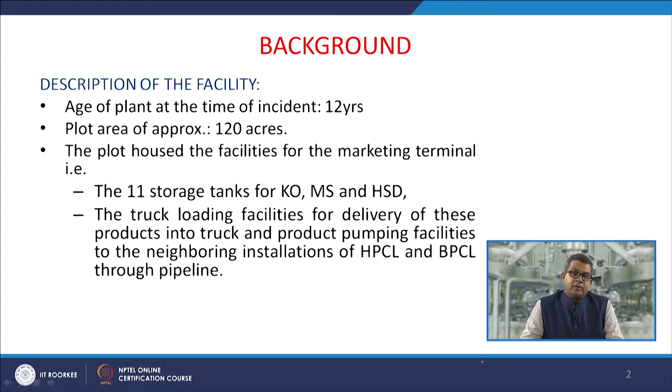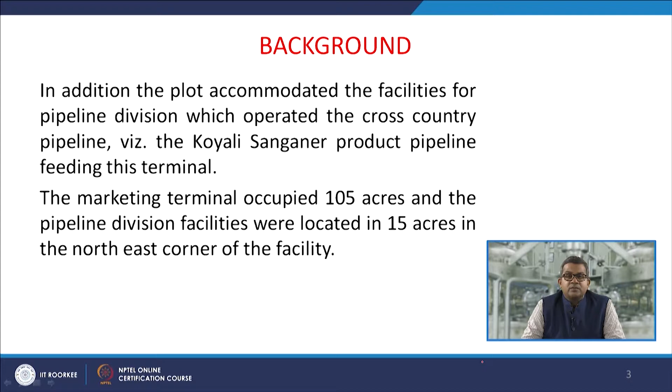Apart from this, they were having truck loading facilities for delivery of these products into trucks, and product pumping facilities to the neighboring installations of Hindustan Petroleum Corporation Limited and Bharat Petroleum Corporation Limited through pipeline. Apart from this, the plot accommodated facilities for the pipeline division, which operated the cross-country Koyali-Sanganer product pipeline feeding this particular terminal. The marketing terminal occupied around 105 acres, while the pipeline division facilities were located in 15 acres in the northeast corner of the facility.

So this was the Koyali-Sanganer pipeline. Here is Sanganer. This is the oil pipeline network of IOCL. They have some existing product pipelines and crude pipelines, well connected with the various refineries of Indian Oil Corporation. Apart from this, they also have certain LPG pipelines. So this is the piping network of Indian Oil Corporation.

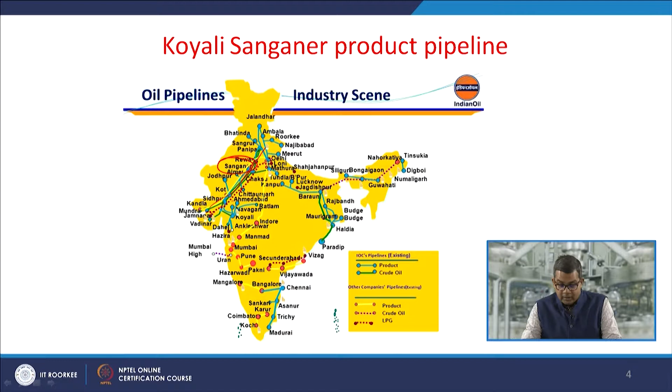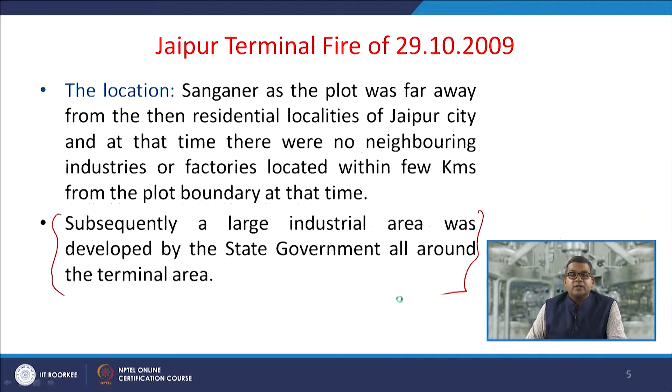Now there are certain salient features of this Jaipur terminal. It was the first automated oil terminal in the country, and this terminal was fed by the Koyali-Sanganer product pipeline, receiving products like motor spirit (petrol), high speed diesel, and kerosene from the Koyali refinery. The terminal also used to receive and distribute lube oils in drums through trucks.

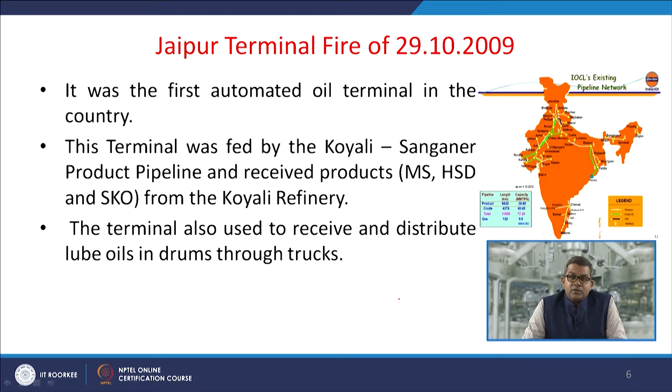So they had storage facilities for lube oils. The terminal delivered petroleum products through tank trucks to retail outlets and also supplied lube oil to the local market of Rajasthan. This particular terminal also supplied petroleum products to the neighboring terminals of other oil companies like HPCL and BPCL. Now, the BPCL Sanganer terminal is dependent entirely on receipt of product from this IOCL terminal.

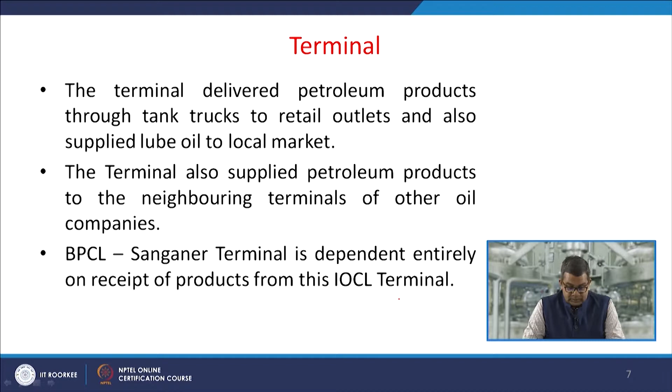This is because these oil companies have some sort of internal arrangement so that they can borrow product from one terminal and share an equivalent amount of product from their own terminal to the other oil company. Now earlier, the HPCL Jaipur terminal in Sanganer, which was in close proximity, was also solely dependent on the supplies from this facility only.

But after the commissioning of the Mundra-Delhi Pipeline (MDPL), the HPCL Jaipur terminal at Sanganer has been closed down for operation, since the commissioning of HPCL's own pipeline terminal at Bagaru, which is only 30 kilometers from Jaipur. So you can see this is the Mundra-Delhi pipeline, and they are having their own terminal here.

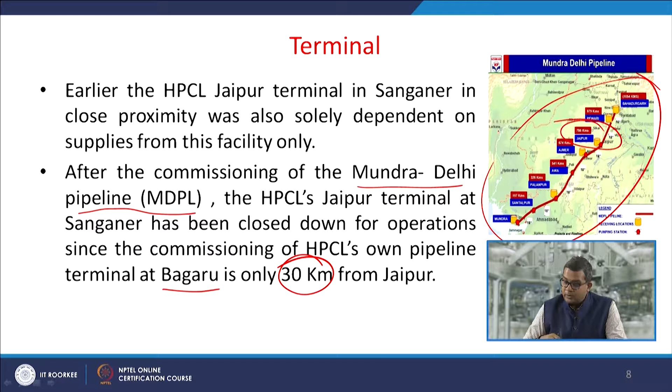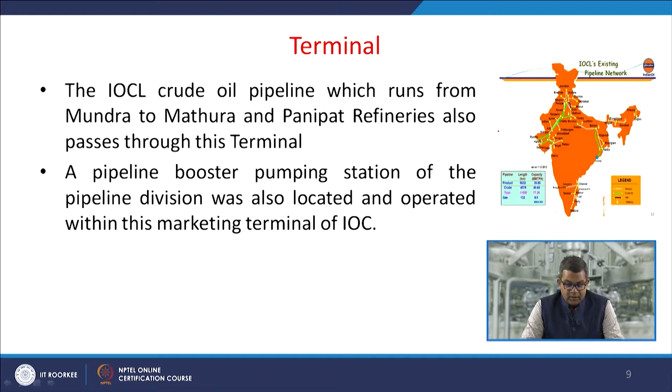Now the IOCL crude oil pipeline, which runs from Mundra to Mathura and Panipat refinery - because in the northern belt, Mathura and Panipat refineries are owned by IOCL - also passes through this particular terminal. So a pipeline booster pumping station of the pipeline division was also located and operated within the marketing terminal of Indian Oil Corporation.

So they had very good storage facilities. The storage facilities originally consisted of 9 tanks for petroleum products, and subsequently 2 more tanks were added for motor spirit, followed by 1 more tank that was not commissioned at the time of the accident, under the pipeline division, for receiving the pipeline interface. There are certain interfaces because sometimes these pipelines carry more than one product, so the interface material is usually sent back to the refineries.

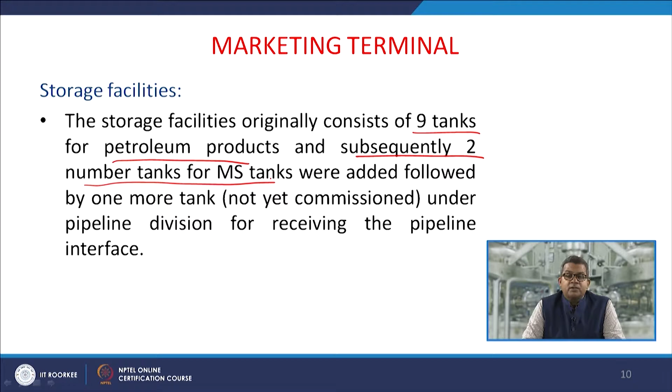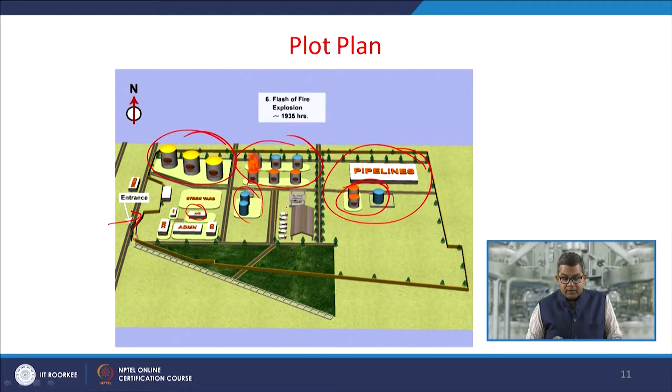So in all, they were having all the tank facilities over here and there. This is the tank lorry depot. Now this is, you can say, the more clear form.

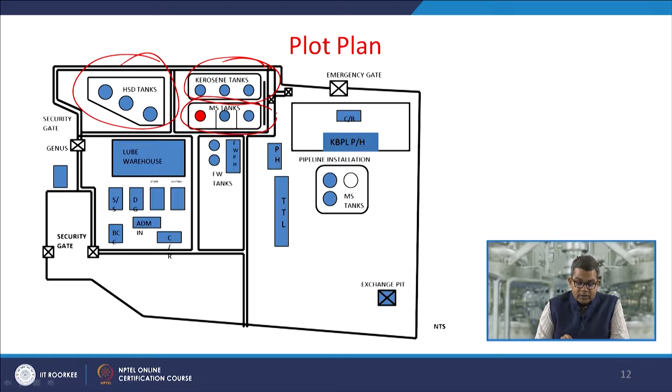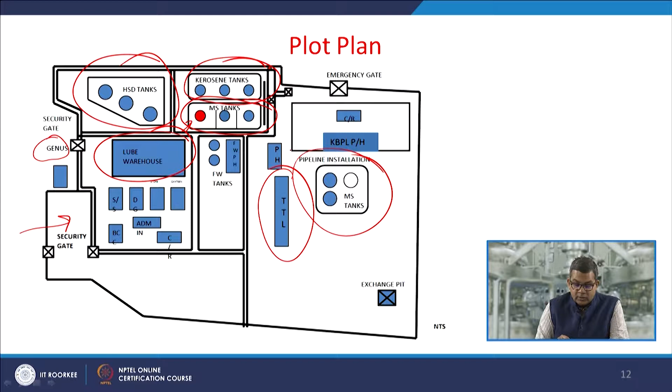Here they were having the high-speed diesel tank facility, the kerosene tank, and the motor spirit tank, which was involved in that particular accident. They were having the lube warehousing apart from the security gate, and adjacent to the security gate they are having one inverter factory called the Genus factory. This was the pipeline installation, and this is the tank truck loading facilities, etc. This was having the exchange pit.

So while we are having the continued discussion about the storage facilities, the underground tanks were 5 in number, each having a capacity of 70 kiloliters for the storage of the petroleum product. Each tank had facilities on 3 modes, and that is important - that was the main crux of the accident.

One mode was the pipeline receipt, so when the material is coming through the pipeline. Second is attributed to the inter-tank transfer, and third one is the dispatch. So these two facilities, the pipeline receipt and dispatch, were inlet and outlet, and this one is for the inter-tank transfer. So when you are having 2 tanks in line, you may connect these 2 tanks. Apart from this, one is inlet, another one is the outlet.

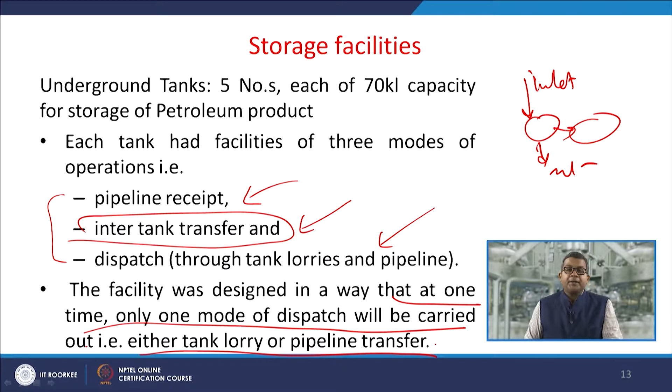Now this facility was designed in a way that at one time only one mode of dispatch will be carried out, that is either tank lorry or a pipeline transfer. So this is again a very important aspect of the designing.

Now each mode of operation was achieved by a positive isolation of a tank. So the proper safety installation or proper safety devices were there. Isolation of the tank from other operation modes using 2 isolation valves, attributed to the gate valve, and they were having a blind or a blank in between them.

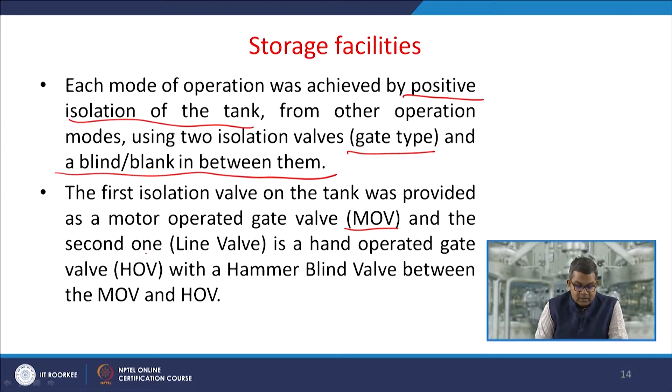So the first isolation valve on the tank was provided as the motor operated gate valve, and in the subsequent slides this is referred as MOV. The second one is the line valve, which is the hand operated gate valve, referred as HOV.

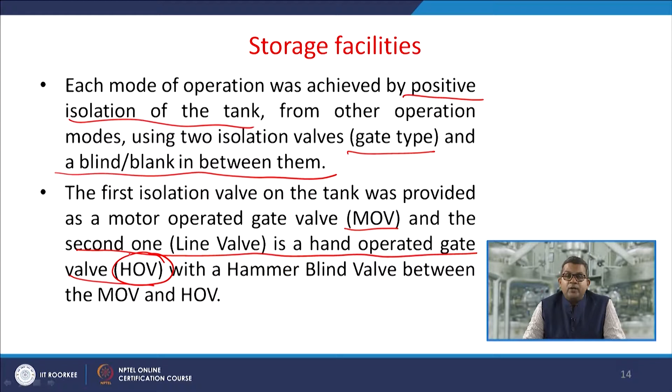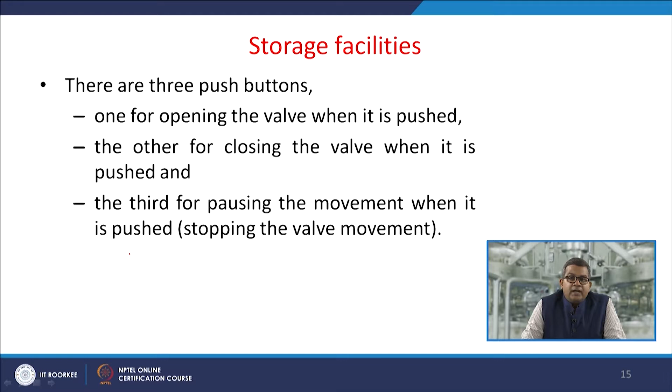Now this they were having a hammer blind valve between the motor operated valve and hand operated valve. They were having three push buttons - one for opening the valve when it is pushed, the other for closing the valve when pushed, and the third for pausing the movement when pushed, for stopping the valve movement. Now these valves can also be operated by means of a hand wheel, just like any other hand operated valve.

So the valve was to close automatically in case of power failure as per the original design feature. Sometimes it may be violated. So at the time of the incident and for the past several years, the facility of remote closing of the valve from the control room and automatic closure of the valve on power failure has not been operational. This facility has been made defunct since 2003 - one of the main reasons why this accident took place.

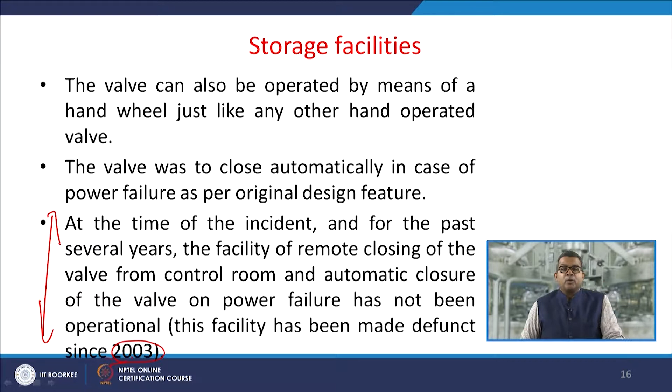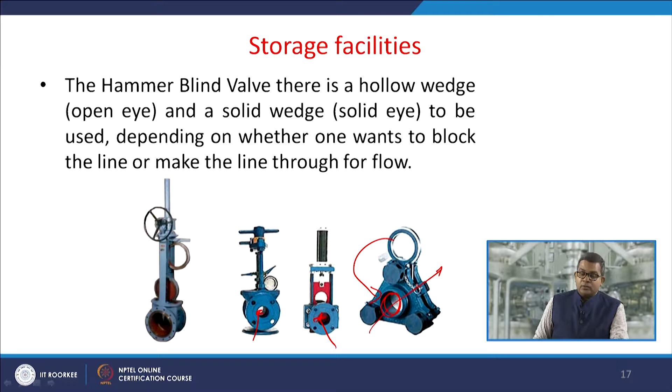So whenever it operates, it moves like this direction - the opening may take place, and if it is like this, then no flow can pass through this particular valve. So there are four different types of HOVs. This is the hand wheel through which you can control the flow, either close or open.

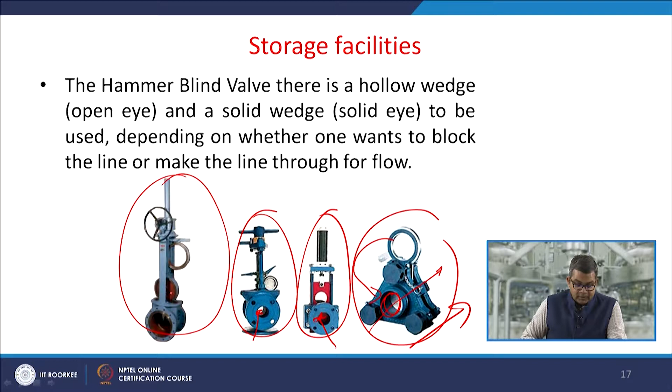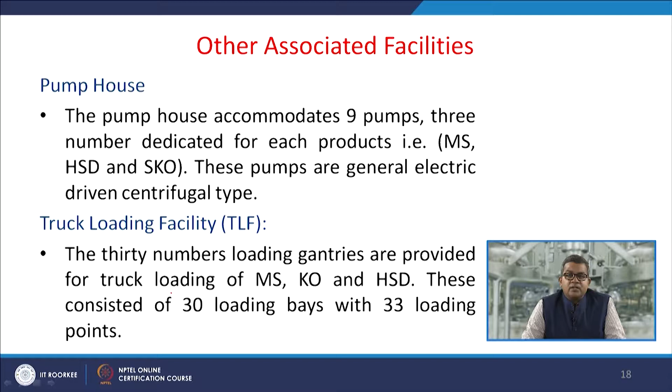The plant was having the truck loading facilities referred as TLF. There are 30 numbers of loading gantries provided for truck loading of motor spirit, kerosene and high speed diesel, and this consists of 30 loading bays with 33 loading points.

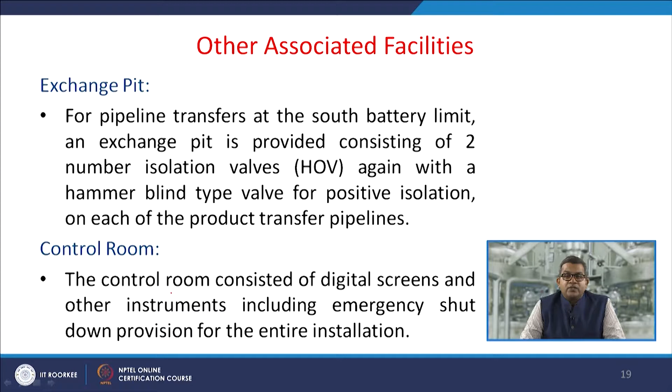They were having a control room. The control room mainly consisted of a digital screen and other instruments, including emergency shutdown provision for the entire installation.

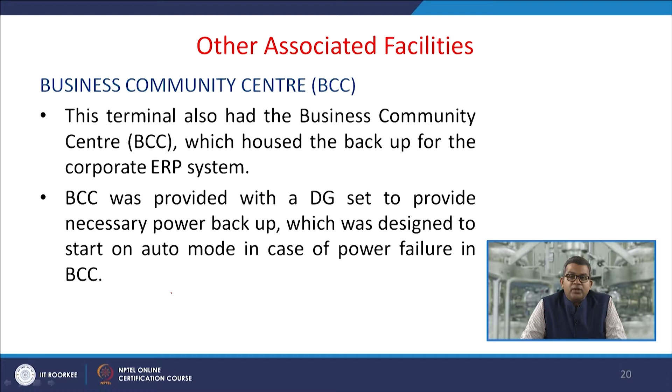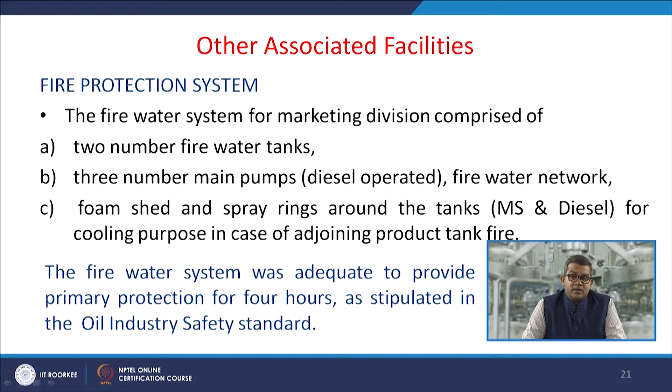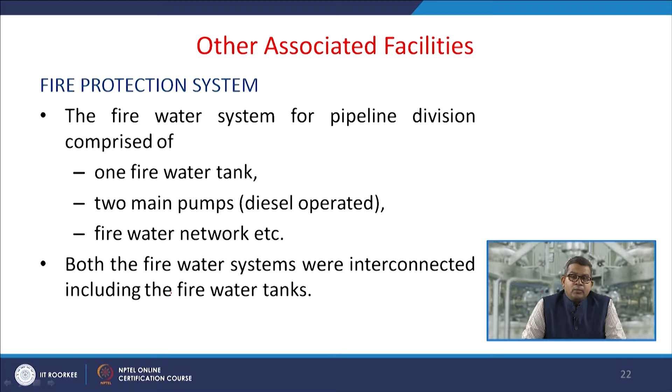The fire water system for the pipeline division was comprised of 1 fire water tank, 2 main pumps, usually diesel operated, and a fire water network. Now both fire water systems were interconnected, including the fire water tanks.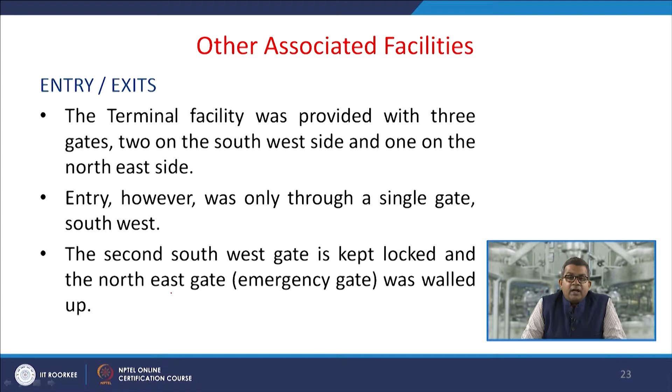They were having some entry and exit protocols. The terminal facility was provided with 3 gates, 2 on the southwest side of the plot and 1 on the northeast side. So why am I telling you all these things? Because at the time of the accident, the meteorological conditions also played a very vital role. So entry was only through a single gate in the southwest, the second southwest gate was kept locked, and the northeast gate was used in terms of emergency protocol.

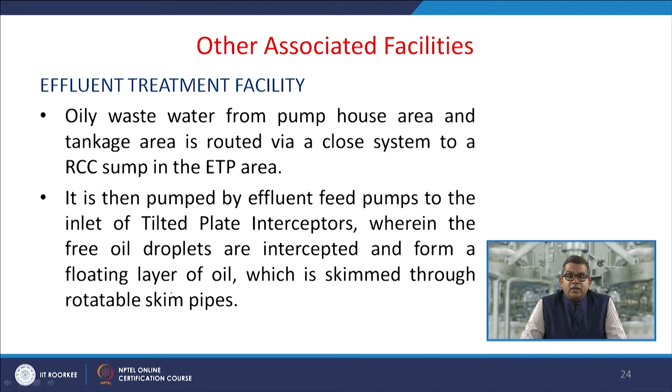Apart from other things, they were having effluent treatment facilities. So oily wastewater from the pump house area and tankage area is routed via closed system to an RCC sump in the effluent treatment plant. It is then pumped with the effluent feed pumps to the inlet of tilted plate interceptors, wherein the free oil droplets are intercepted and form a floating layer of oil, which is skimmed through rotatable skimming pipes.

As far as the personnel are concerned, the Jaipur terminal worked under the overall guidance of the General Manager, Rajasthan State Office. They have the IOCL regional center at Jaipur. Apart from this, there are 10 other officers with different responsibilities, 24 blue collar workers, and 4 clerical staff.

Now let us have a discussion about the operation. This terminal usually operated in 3 shifts for terminal operation, with timings of 6 a.m. to 2 p.m., 2 p.m. to 10 p.m., and 10 p.m. to 6 a.m. in the morning.

The TLF, that is the truck loading facility operation, was restricted to the morning general shift operation, from 8 a.m. to 5 p.m. The control room was supposed to be manned, but there was no dedicated person for it, and occasionally when all 4 people were out in the field for different jobs, it remained unmanned. This is again a problematic issue.

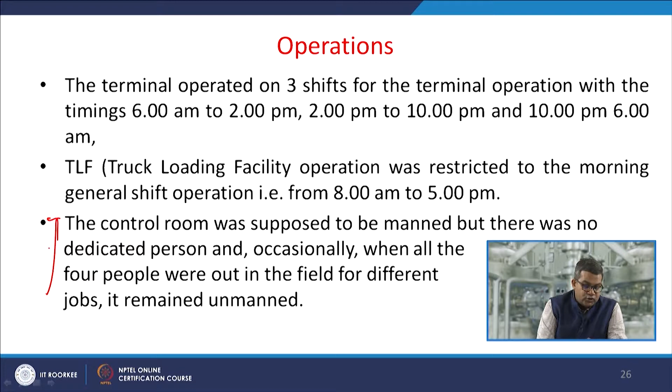In the evening shift of October 29, 2009, the IOC petroleum oil lubricant terminal at Sanganer in Jaipur was preparing to transfer kerosene and motor spirit to the neighboring BPCL terminal. That was obviously a routine operation.

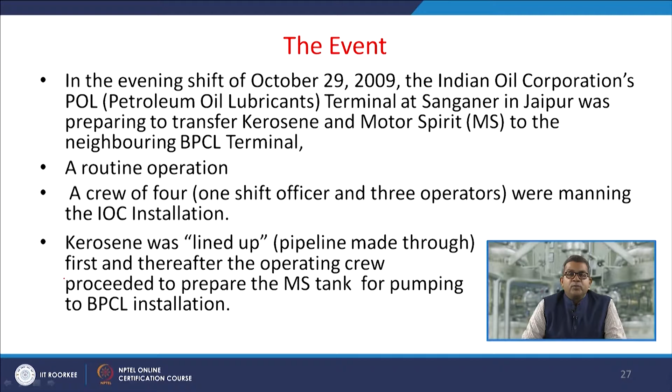So a crew of 4, 1 shift officer and 3 operators, were manning the IOCL installation, and kerosene was lined up first, through pipeline, and thereafter the operating crew proceeded to prepare the motor spirit tank for pumping to the BPCL installation.

So in the process of lining up the MS tank, at around 6:10 p.m., a huge leak of the product took place as a jet of liquid from the hammer blind valve on the delivery line of the tank leading to the MS pump, that is the motor spirit pump. This liquid petrol rapidly generated vapors and soon overwhelmed and incapacitated the operators carrying out the lineup operation. They were practically helpless at the moment, because the quantum, velocity, and pressure were so high.

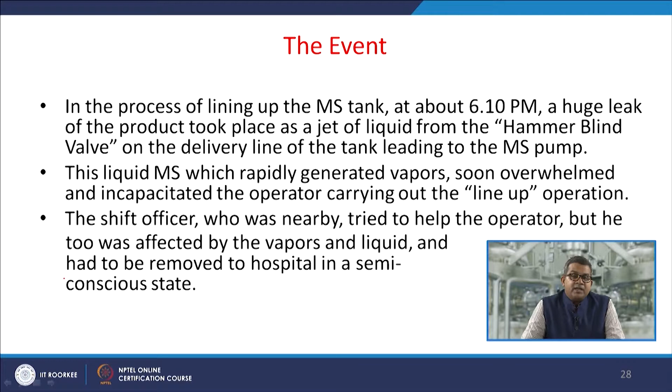The shift officer who was nearby tried to help the operator, but he too was affected by the vapors and liquid and had to be removed to hospital in a semi-conscious state. So you can imagine the scenario.

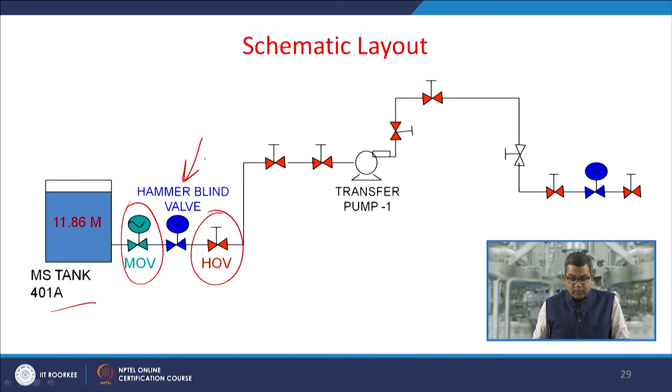So this is the schematic layout. This was the motor spirit tank, and that was the MOV, and this is the HOV, and this one is the hammer blind valve. So this was the transfer pump, and this is again the same scenario. So the problem took place in synchronizing all these 3 steps.

So now the standard operating sequence was to ensure that MOV and HOV, this and this, both are closed. Then reverse the position of hammer blind valve so that you can have a desired scenario.

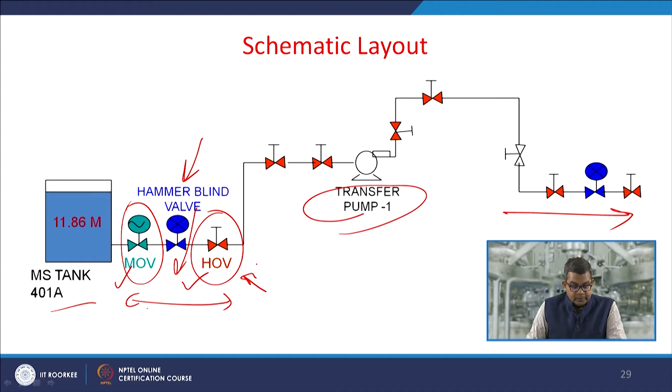Then open the HOV, this one. Then open the MOV, initially inching operation to establish the leakage from hammer blind valve body.

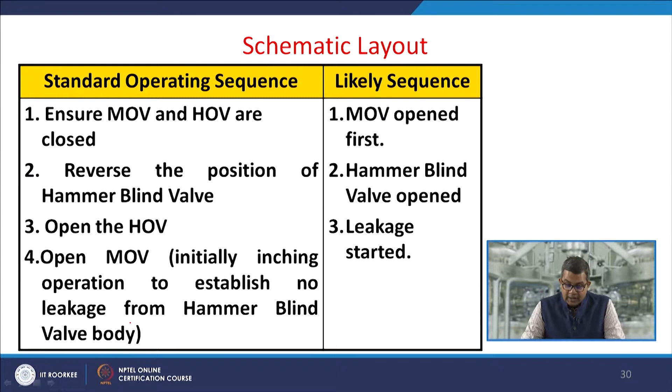Now the likely sequence was the MOV opened first, however desired was the HOV, but initially MOV opened first, and then hammer blind valve was opened, that is in the second step, and because of lack of this synchronization, the leakage started.

So the second operator, who was incidentally in the canteen at the time, also rushed to the spot, but he was also completely overpowered by the strong petrol vapors and liquid and could not be rescued.

So the third operator on the shift, who was supposed to be on site, had earlier left for home for some personal work and was thus not available to initiate any rescue or mitigation step. So these two are again the contributing events in that particular accident.

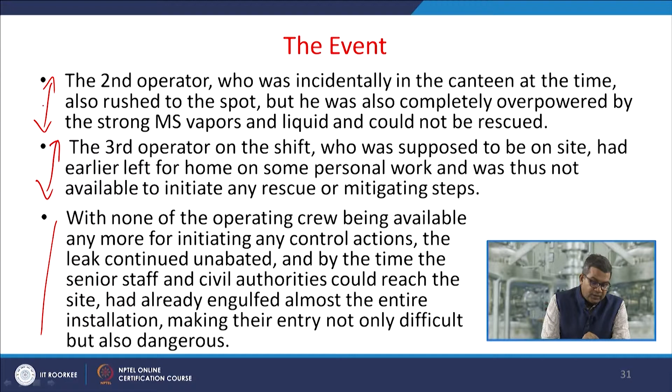With none of the operating crew being available anymore for initiating any control action, the leak continued unabated, and by the time the senior staff and civil authorities could reach the site, it had already engulfed almost the entire installation, making their entry not only difficult but also dangerous. So you can say that this was the initiation and this is the total propagation.

So after about an hour and 15 minutes, the leak having started, there was a massive explosion followed by a huge fireball covering the entire installation.

It is estimated that in this 1 hour and 15 to 20 minutes of uncontrolled leak, about 1,000 tons of motor spirit could have escaped out, which would have generated enough vapor to cause an explosion with an equivalence of almost 20 tons of TNT.

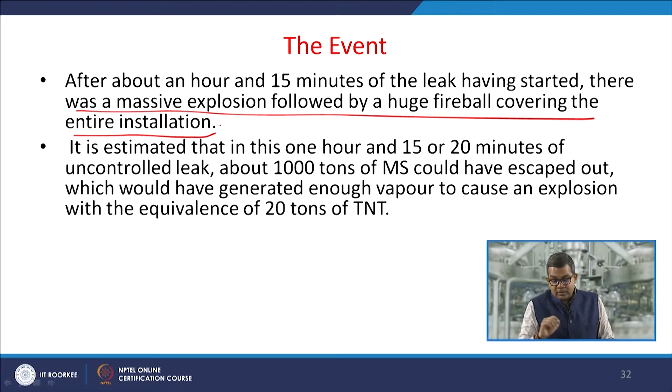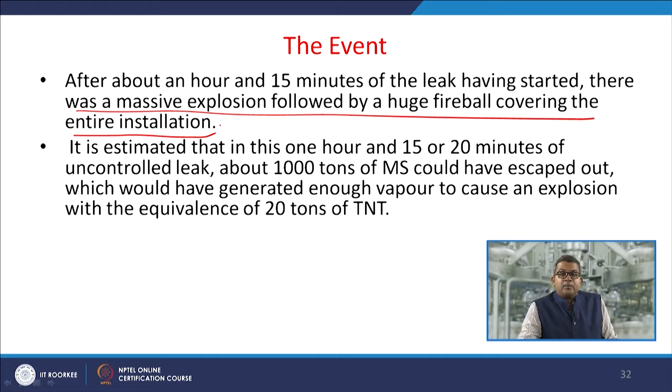Now remember, when this huge fireball occurred, there was a generation of a huge quantum of heat, and that may, by any mode of heat transfer, initiate vapor formation and pressure buildup in the adjoining tank. So the explosion in other adjoining tanks may have taken place.

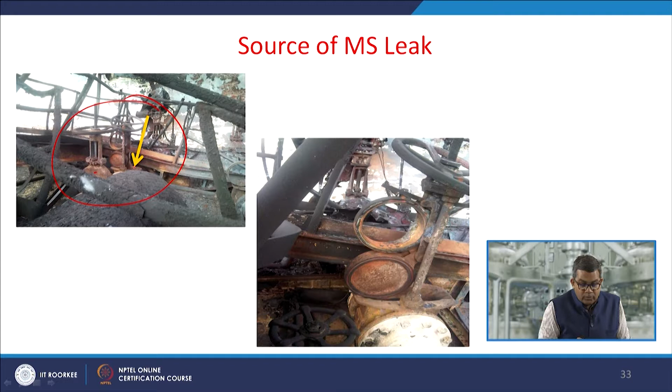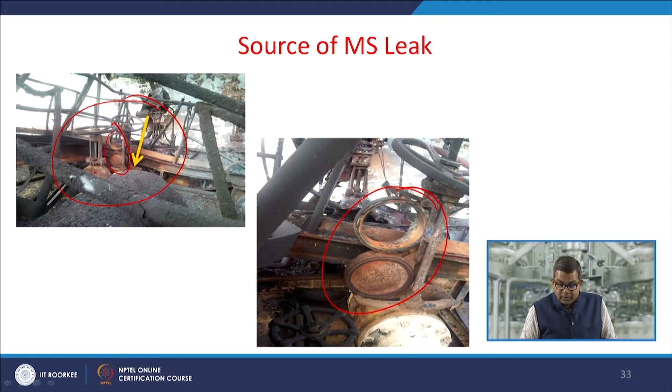Now this was the source of the motor spirit leak. You can visualize there is a hand operated valve, motor operated valve, and this one is the blind or blank. Now this is the main scenario. So it was not being inserted properly while the transfer took place.

So let us have a look at all three steps of this particular incident: initiation, propagation and termination. The source of ignition which triggered the explosion and fire could have been from one of the non-flame-proof electrical equipment in the administrative block, or from a vehicle being started in the installation.

Now remember, when vapor escapes from any kind of facility in terms of a vapor cloud, and if it is exposed to the atmosphere, it may form an uncontrolled vapor cloud. Then it's very difficult to prevent the presence of all kinds of ignition sources, and moreover these vapors are under the grip of atmospheric air, so a sufficient supply of oxygen is also there. So you cannot avoid the scenario of generation of either a fireball or fire.

So the fire which followed the explosion soon spread to all other tanks and continued to rage for about 11 days. So that was the propagation step.

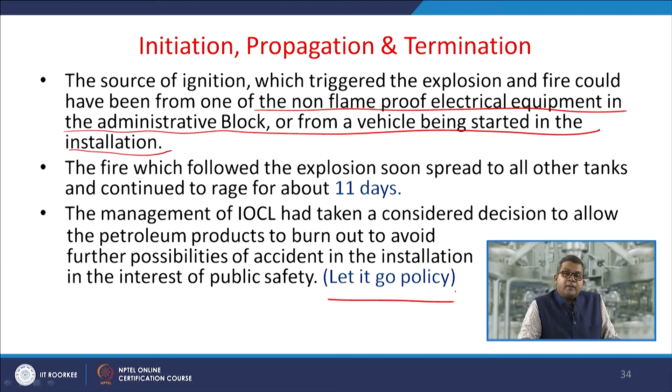The management of IOCL took a considered decision to allow the petroleum product to burn out to avoid further possibilities of accident in the installation in the interest of public safety. So you can say that it was a let-it-go policy, because practically the quantum of heat was so high at the moment that they were practically helpless to extinguish the fire by the usual methods available as on date.

So ultimately, while we consider the termination and discuss the losses, about 60,000 kiloliters of petroleum products stored in the terminal, equivalent to about 1000 to 1200 retail outlets at the time of the accident, was consumed in the fire and the installation was totally destroyed.

Now, buildings in the immediate neighborhood were heavily damaged, with minor damage and window pane breakage occurring up to around 2 kilometers from the site. The reason was that when the tanks exploded, the noise or vibration was so high that all the window panes were damaged, with cracks etc. taking place at the site.

So the total loss estimated on account of the fire and explosion, as reported by Indian Oil Corporation in the press, which includes the loss of the finished product, stores, fixed assets, and compensation for third party losses, amounted to 280 crores.

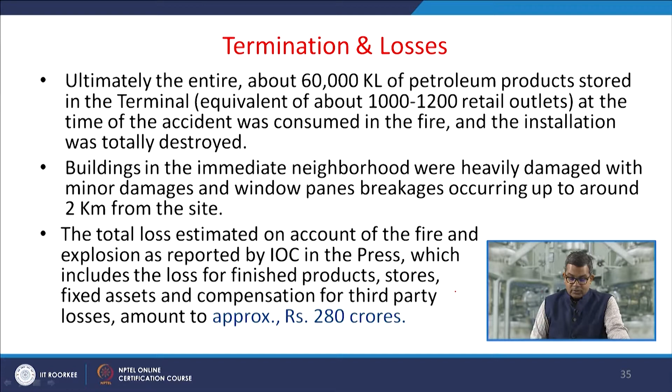11 people lost their lives in the accident, 6 from IOC and 5 outsiders, and several others were injured. The Ministry of Petroleum and Natural Gas immediately, on 30th September 2009, constituted a 7-member independent inquiry committee to inquire into the incident.

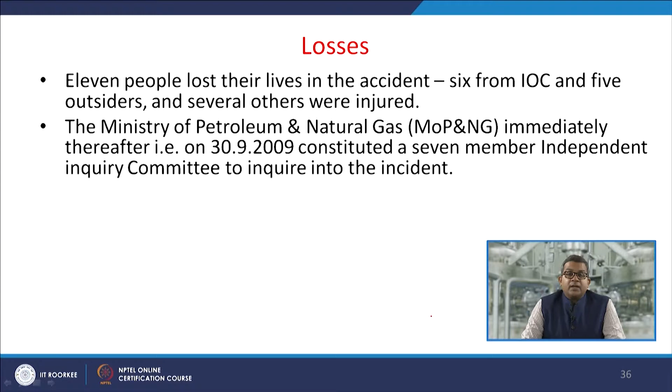In a nutshell, the operators didn't follow the protocol, meaning there was a lack of training and technical competency. The immediate cause of the accident was the non-observance of normal safety protocols involving the sequence of valve operation in the line-up activity, and an engineering design which permitted use of a hammer blind valve, a device used for the positive isolation of a pipeline. So they did not follow the standard operating protocol.

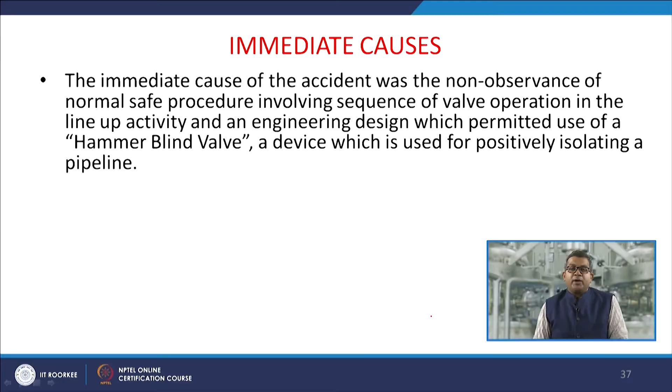The root causes were the absence of a site-specific written operating protocol or procedure, and the absence of leak-stopping devices from a remote location. This facility of remotely closing the motor operated valve connecting to the tank side could have stopped the leak. Although some safety protocols existed, they were defunct at the time of the accident.

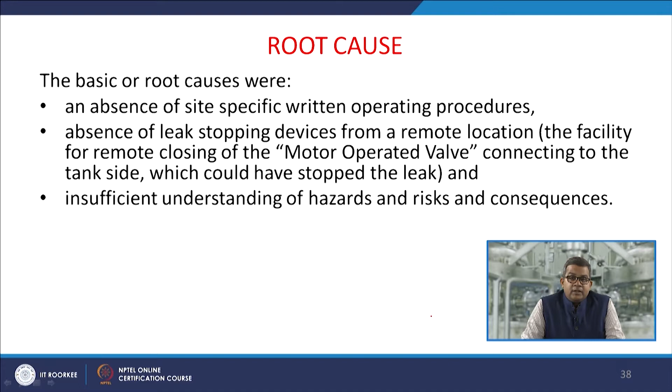There was insufficient understanding of hazard and risk consequences. There are certain critical factors involved in that particular plant. The critical factors which resulted in the catastrophic accident include loss of primary containment of motor spirit, that is petrol. Practically, they were not in a position to contain the motor spirit, so it escaped from the storage facility.

There was also loss of secondary containment. The operating person was incapacitated, because at the time of the accident one was away at home and the remaining persons were not in a position to control the situation. They did not have proper mitigation measures at the time of the accident.

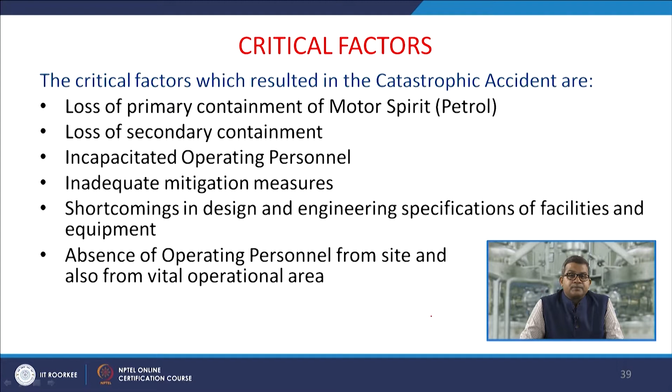So there were inadequate mitigation measures and many shortcomings in the design and engineering specification of facilities and equipment, because when the person is not in a position to operate the HOV or MOV with the blind, there are definitely shortcomings in design and engineering specification. There was also absence of operating personnel from the site and from the vital operation area, which they were not supposed to do.

Then the question arises about the responses. Information about the leak and hazard was conveyed by the security staff on site to the terminal senior manager and others. The state and local civil authorities were alerted by IOC state-level officers, and within about 30-45 minutes almost all persons and agencies in the city and around had come to the site.

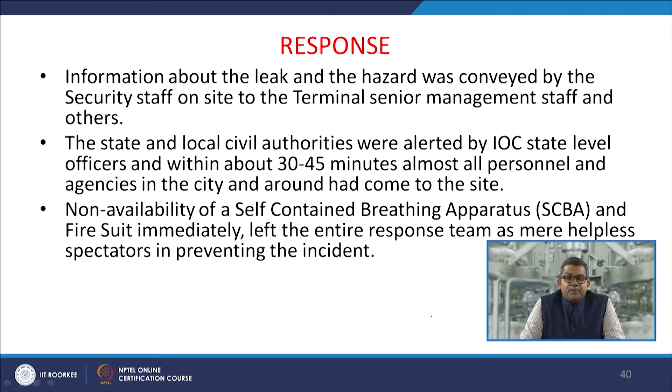There was a serious non-availability of self-contained breathing apparatus and fire suits immediately. When these were not available, it left the entire response team as mere helpless spectators in preventing the incident.

This accident was attributed to a vapor cloud explosion, with the explosion occurring to the tune of approximately 20 tons of TNT. 9 of the total 11 tanks caught fire immediately after the first explosion, while the balance 2 tanks, at a distance, caught fire after some time due to regular heat transfer modes. A decision was taken to allow the fuel, about 60,000 kiloliters, to burn, as all fixed firefighting facilities at the location had been demolished and they were not in a position to handle the scenario via external firefighting devices.

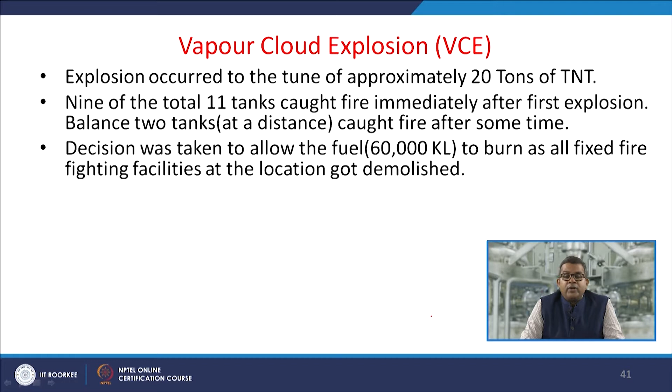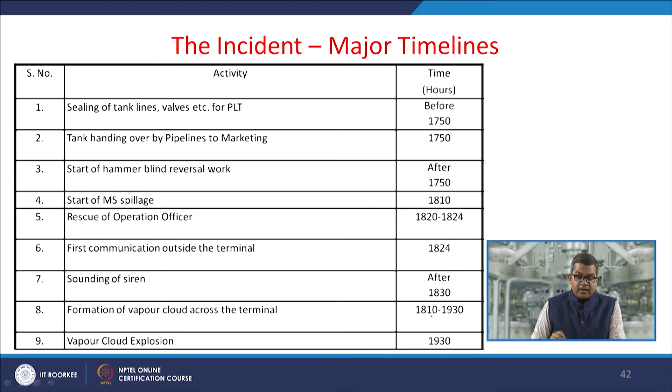This is the major timeline for the accident. The sealing of tank lines, valves, etc. took place before 5:50 p.m., with the tank handed over by pipelines to marketing at 5:50 p.m. The start of hammer blind reversal work began after 5:50, and the start of motor spirit spillage occurred around 6:10 p.m.

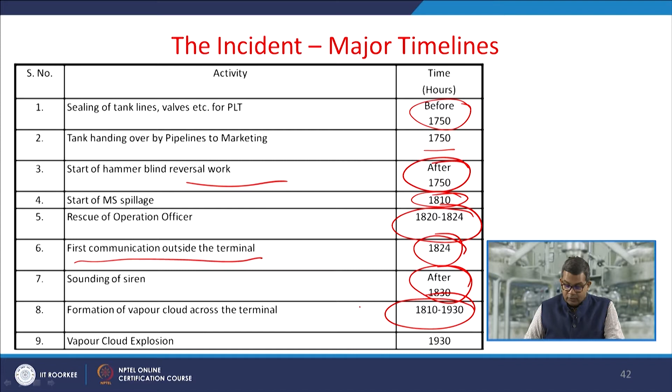The rescue of the operation officer took place between 6:20 and 6:24, and the first communication outside the terminal was given at 6:24. The siren sounded after 6:30, and the formation of the vapor cloud across the terminal took place between 6:10 p.m. and 7:30 p.m., with the vapor cloud explosion occurring at 7:30 p.m.

Now we can discuss the possible scenarios for this accident. In scenario 1, the motor operated valve was in an open condition before the start of the hammer blind reversal job. This may be attributed to it being opened by someone at any time between the previous blinding operation and 29th October 2009, since it is not possible to establish any one of these conclusively. The reason is that whenever they started the job, they would definitely have looked into this aspect.

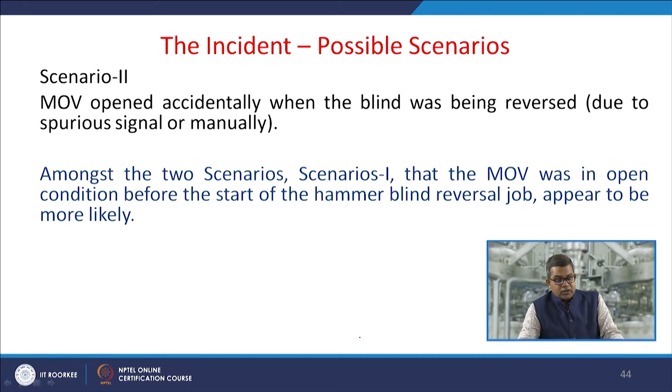In scenario 2, the motor operated valve opened accidentally when the blind was being reversed, due to a spurious signal or manually. Among the two scenarios, scenario 1, that the MOV was in open condition before the start of the hammer blind reversal job, appeared to be more likely. When they discussed these two scenarios, they found this one to be most appropriate.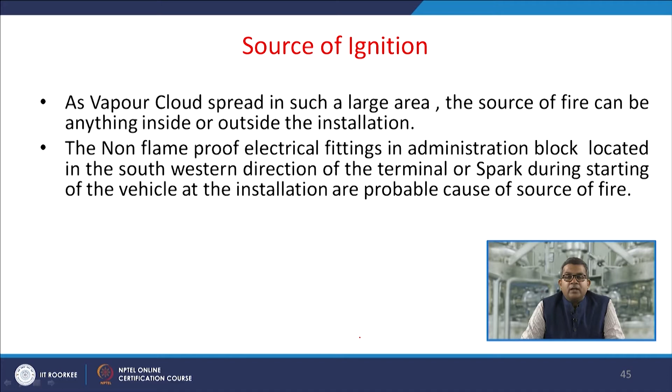Then they discussed the source of ignition. As the vapor cloud spread over such a large area, the source of fire could be anything inside or outside the installation. The non-flame proof electrical fittings in the administration block, located in the southwestern direction of the terminal, or a spark during starting of a vehicle at the installation, were the probable causes of the source of fire.

There were certain contributing factors to this incident. One is the non-availability of one of the shift workmen who was supposed to be on duty. When the investigation team carried out the investigation, they found these contributing factors.

Second, the control room remaining unmanned due to the above. Third, the absence of a specific written-down procedure for the works to be undertaken, leading to reliance on practice. Fourth, the opening of the hand operated valve before completion of the hammer blind reversal operation.

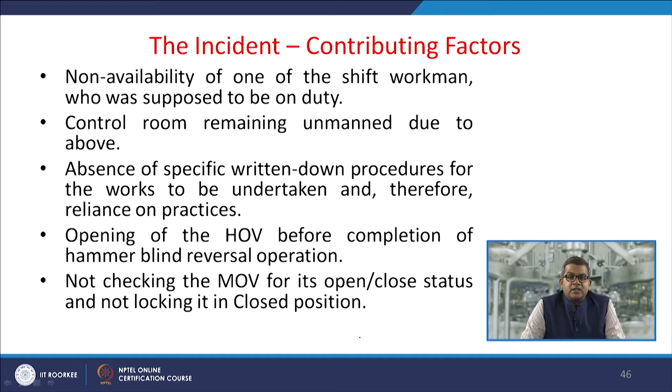Another factor was not checking the motor operated valve for its open-close status and not locking it in the closed position.

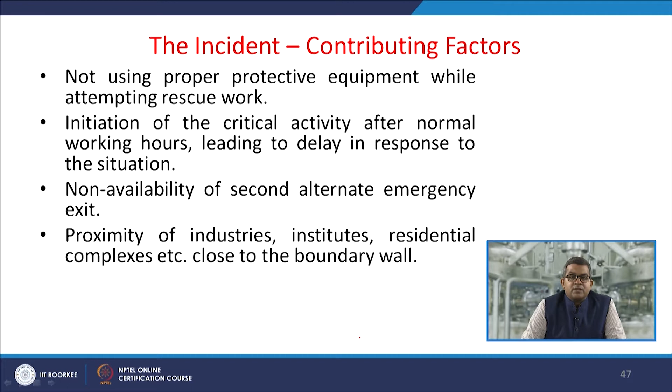One factor may be not using proper protective equipment while attempting rescue work. Another is the initiation of the critical activity after normal working hours, leading to a delay in response to the situation. Sometimes another contributing factor may be the non-availability of a second alternate emergency exit. And the last one is the proximity of industries, institutes, and residential complexes close to the boundary wall.

Based on all the facts and the accident, the Ministry of Petroleum and Natural Gas, Government of India, constituted an independent 7-member committee headed by Shri M.B. Lal, ex-chairman of Hindustan Petroleum Corporation, to inquire into the incident. The committee submitted their report on 29th January 2009 and made the following observations.

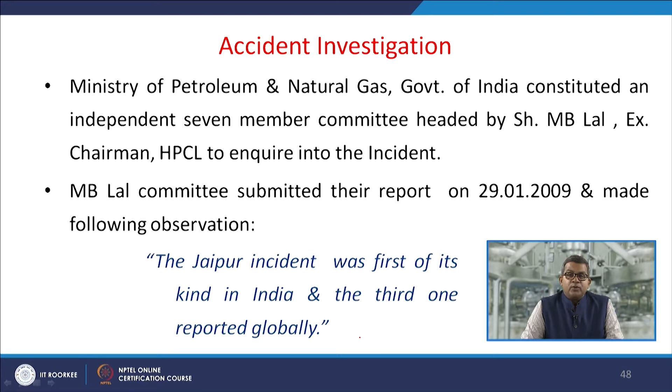This Jaipur accident was the first of its kind in India and the third reported globally. So you can assess the gravity of that particular incident.

The committee made different conclusions on cause. The loss of containment, in terms of time and quantity, was never considered a credible event and accordingly was not taken into the hazard identification—this must be part of hazard identification for future study. Also, the basic operating procedure for hammer blind opening was not followed.

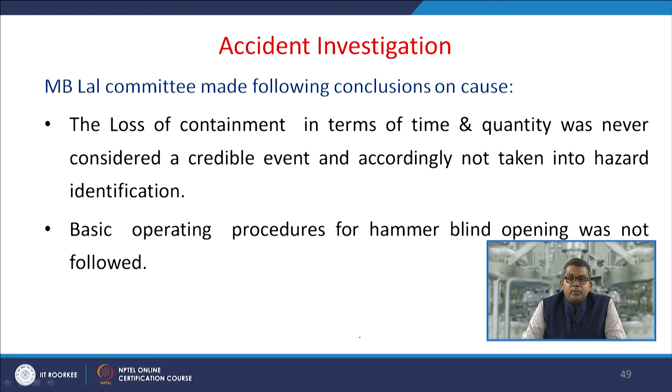The overall lesson is that facilities and installations with inherently high hazards should incorporate redundancy in the safety system and ensure their upkeep at all times. Management should ensure reliable systems are in place to give timely feedback on current practices and the state of readiness in different facilities.

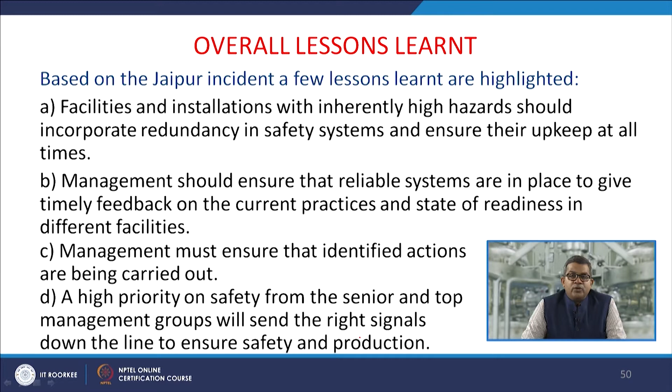Management must ensure that identified actions are being carried out. A high priority on safety from senior and top management groups will send the right signal down the line to ensure both safety and production.

A high degree of operational competency should be maintained at all times by building on the combined knowledge and experience of all professional groups. Lessons from all major incidents should be shared as part of safety reviews, and widely disseminated in the entire industry, preferably through an appropriate website.

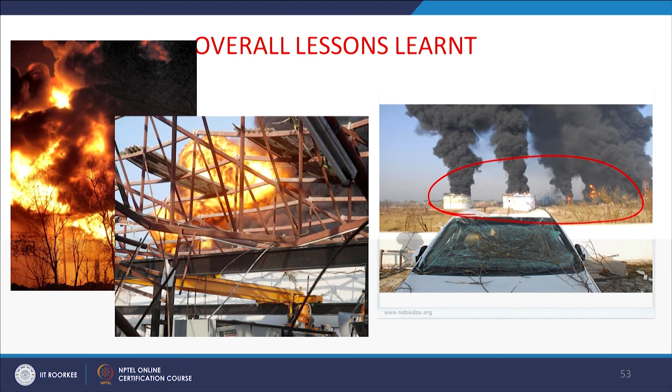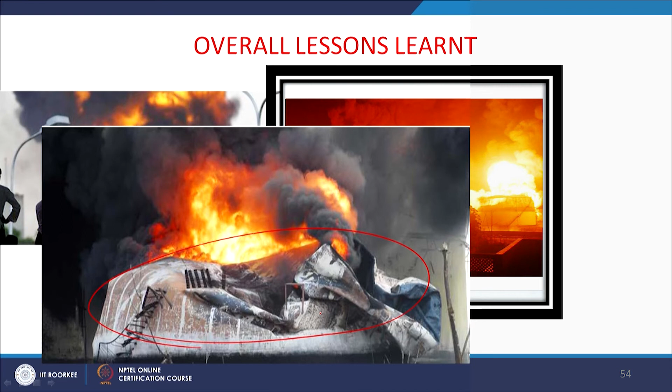Now you can see the gravity of this particular accident through these photographs. These tanks were burning, and a car in the nearby location was burned out. This is the storage tank facility—see how much pressure was built up, so that the entire tank, which was such a strong installation, collapsed.

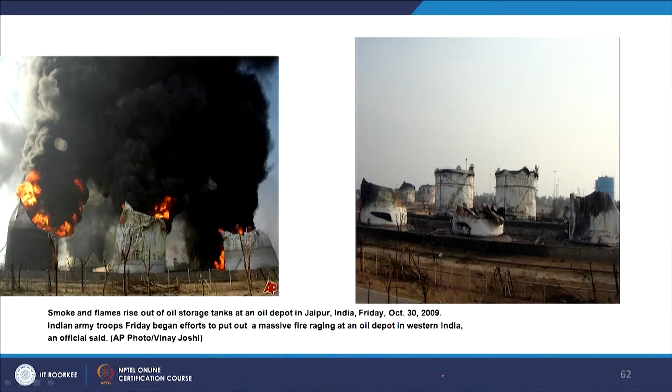After the accident, this was the scenario of all the tanks that were there at the time. You can see the black smoke and flames coming out of the oil depot in Jaipur.

So through this particular case study, we studied what can be considered one of the latest fire and explosion accidents. Again, by not observing the standard operating protocol, this kind of major accident may take place in any kind of establishment. Thank you very much.